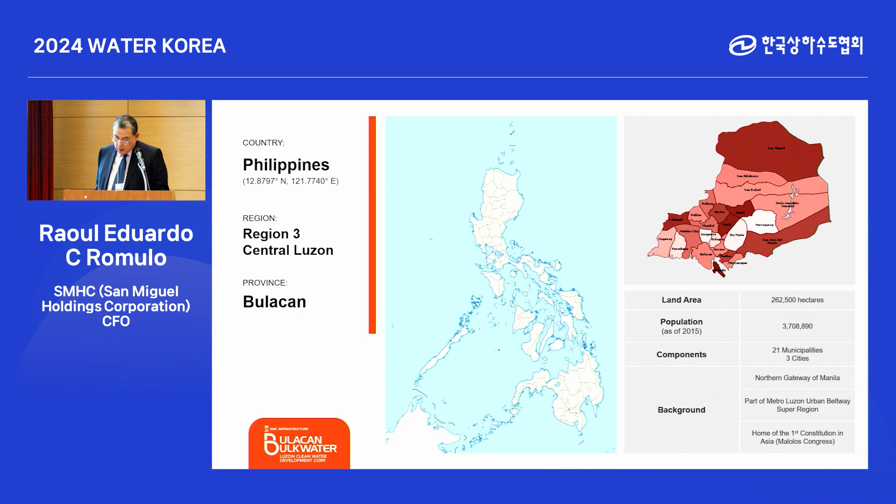Bulacan province is located in the central Luzon region adjacent to Metro Manila, the Philippine capital, and is part of the Metro Luzon Urban Beltway super region. It has a population of roughly 3.71 million people, the third most populous province in the Philippines. It is also the place where the next Philippine gateway, the new Manila International Airport, also a project of San Miguel, will rise.

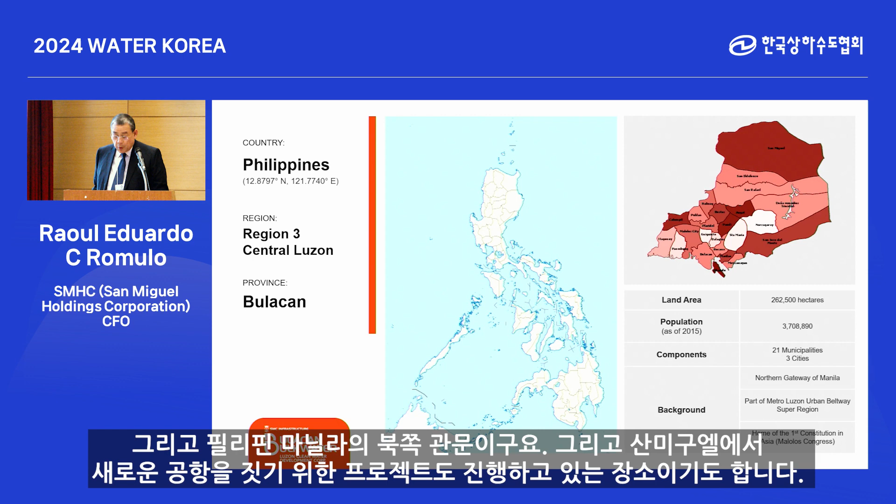Prior to the Bulacan Water Supply Project, most water districts in Bulacan faced several obstacles impinging their ability to supply water to the region. These are the major disadvantages: first, inadequate supply; second, low water pressure; third, depleting groundwater aquifers and saltwater intrusion; fourth, aging distribution pipelines; and fifth, high non-revenue water. The average non-revenue water in this area is 40%.

According to the 2013 feasibility study conducted by IMC Worldwide for the Metropolitan Waterworks and Sewerage System, 68% of households have access to piped water, while 32% rely on standalone water points such as hand pumps and shallow water wells. This shows the inadequacy of the water supply in the area. Due to the depletion of groundwater, it is expected that the water supply in Bulacan province will continue to be insufficient and inadequate to meet the community's current and future demand.

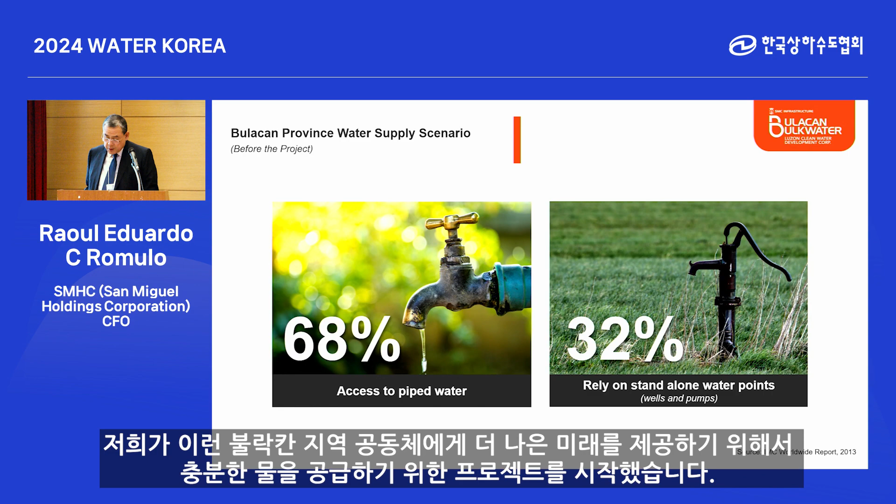Luzon Clean Water Development Corporation is a consortium of San Miguel Holdings Corporation and K-Water. It is mandated to finance, build, operate, and maintain a complete water supply treatment with conveyance facilities for the Bulacan province. Their concession term, given through the Metropolitan Waterworks and Sewerage System, is 30 years.

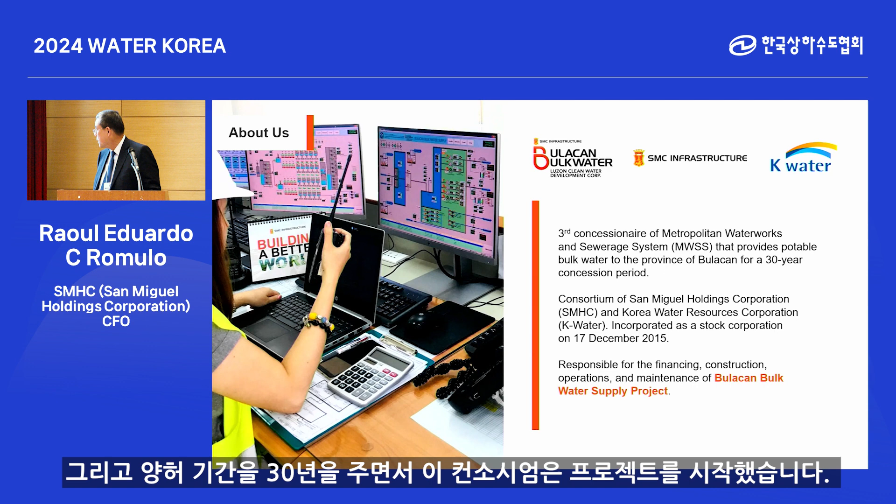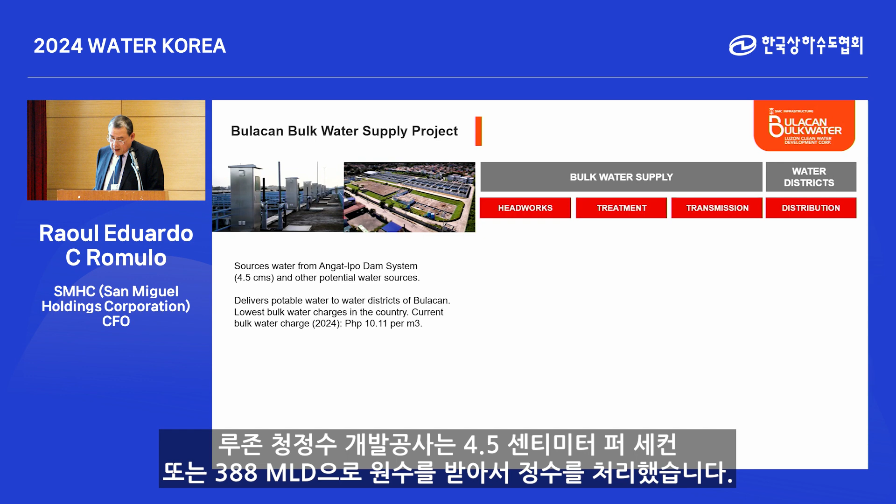Under the concession agreement, Luzon Clean Water Development Corporation, or LCWDC, should be able to utilize 4.5 cubic meters per second, or 388 MLD, of raw water allocation from the Metropolitan Waterworks and Sewerage System and the provincial government of Bulacan, from the existing Angat Ipo Dam system, which is also the major source of raw water for Metro Manila and neighboring provinces.

The initial implementation of the project was to construct a water treatment plant and conveyance facility to cater to 12 water districts, including 3 cities and 9 urban towns of Bulacan province.

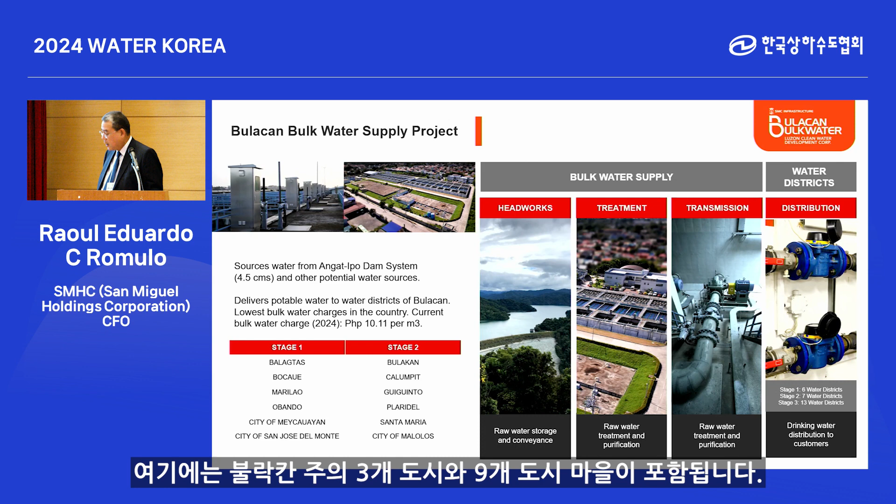How did the project materialize? In 1992, the Metropolitan Waterworks and Sewerage System, a government-owned and controlled corporation mandated to provide water supply in Metro Manila, included Bulacan province in its service area for the purpose of supplying bulk water. After going through the various Philippine government approval processes, which isn't an easy process, MWSS entered into a tripartite agreement with the provincial government of Bulacan and the 12 water districts for the implementation of the Bulacan Bulk Water Supply Project.

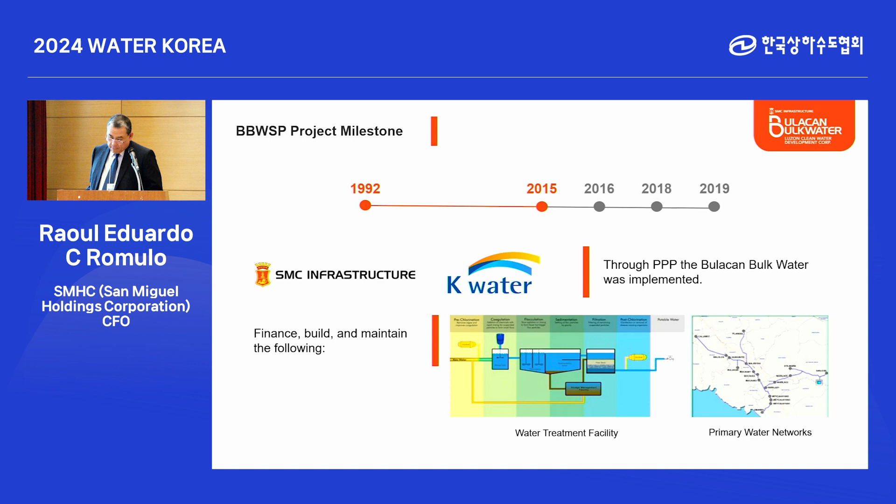In 2015, MWSS commenced the competitive bidding for the Bulacan Bulk Water Supply under a public-private partnership. The project was awarded to the consortium of San Miguel Corporation and K-Water, incorporated under the name Luzon Clean Water Development Corporation, to finance, build, operate, and maintain a complete water treatment and supply conveyance facility. Construction started in July 2016 for the water treatment facility, the primary conveyance lines, and the interconnection points for stages 1 and 2 water districts, and it commenced two years after.

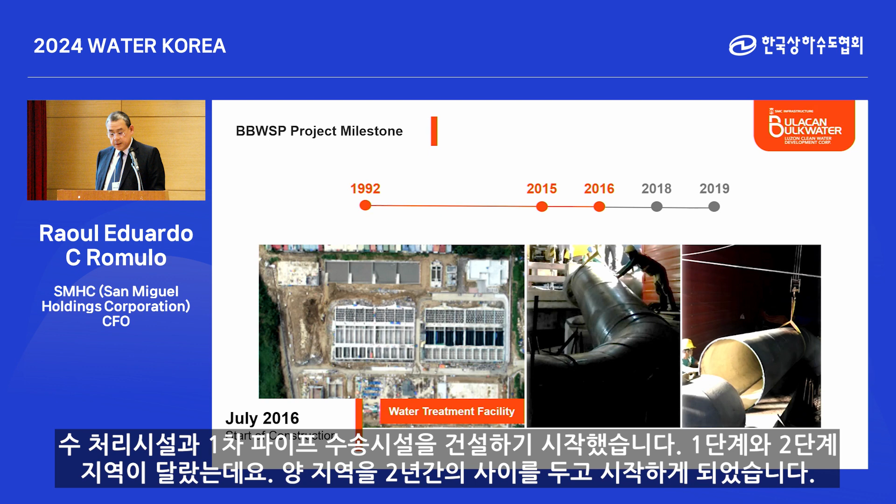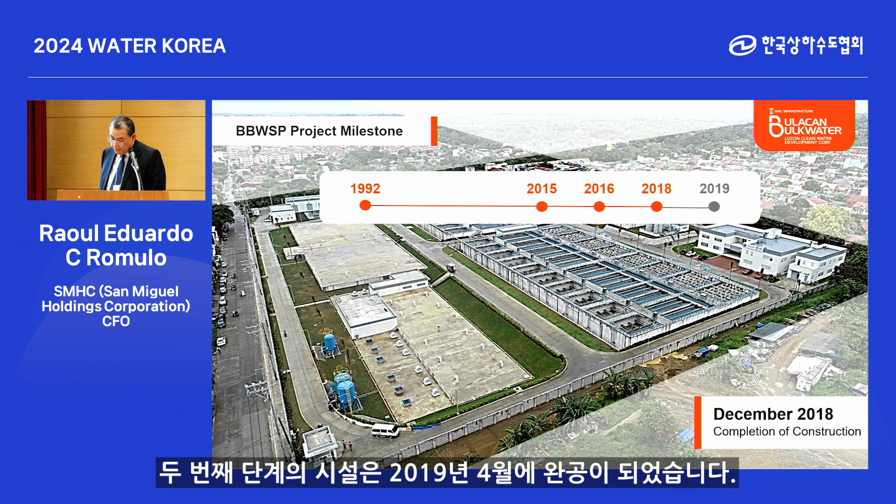On December 17, 2018, the construction of the water treatment plant, primary lines, and interconnection points for Stage 1 was completed. The Stage 2 facilities were completed on April 6, 2019, 20 days ahead of the agreed timeline.

Stage 1 of the Bulacan Bulk Water Supply Project was activated on December 30, 2018, 28 days in advance of its targeted commercial operation in January 2019. On the other hand, the Santa Maria Water District under Stage 2 of the project was activated or energized in

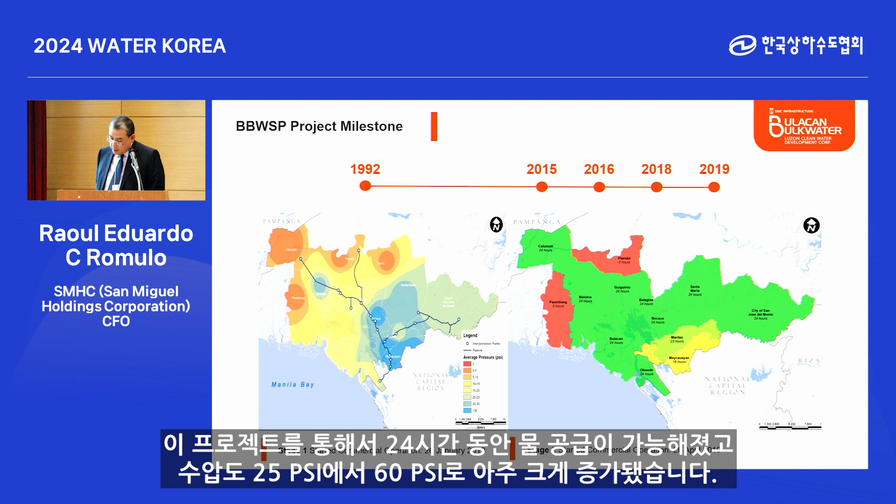February 2019, 2 months earlier than the target commercial operation. Since its first year of operation in 2019, the Bulacan Bulk Water Project has given its water districts 24/7 operation and service, a clear improvement from the previous service of only 12 to 16 hours a day. The project also provided a drastic increase in the average water pressure in the area, from 25 psi to 60 psi at present.

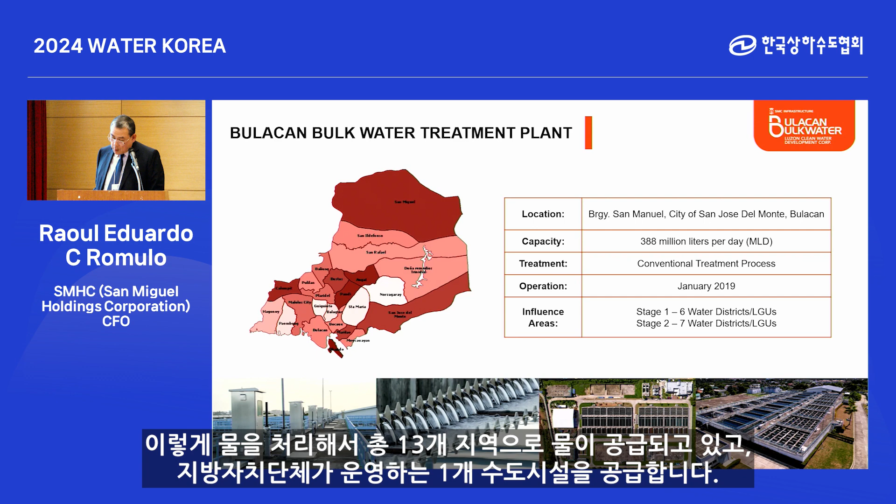Currently, Luzon Water is maintaining a 388 million liters per day capacity water treatment plant using the conventional treatment process. It produces 230 million liters per day, supplies 13 water districts, and 1 waterworks system run by the local government. To reach the outskirts of Bulacan, the company installed 66 kilometers of pipelines.

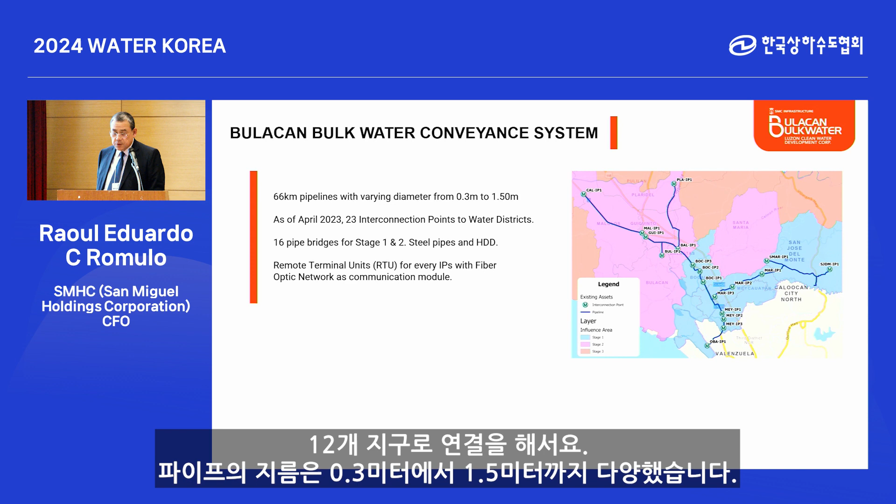From the water treatment plant connecting to the 12 water districts, with pipe sizes ranging from 300 millimeters to 1,500 millimeters, there are 23 interconnection points constructed which serve as tapping or extracting points for water districts from the Bulacan bulk water mainline. It is equipped with SCADA facility for real-time communication of flow rate, pressure, and key water parameters.

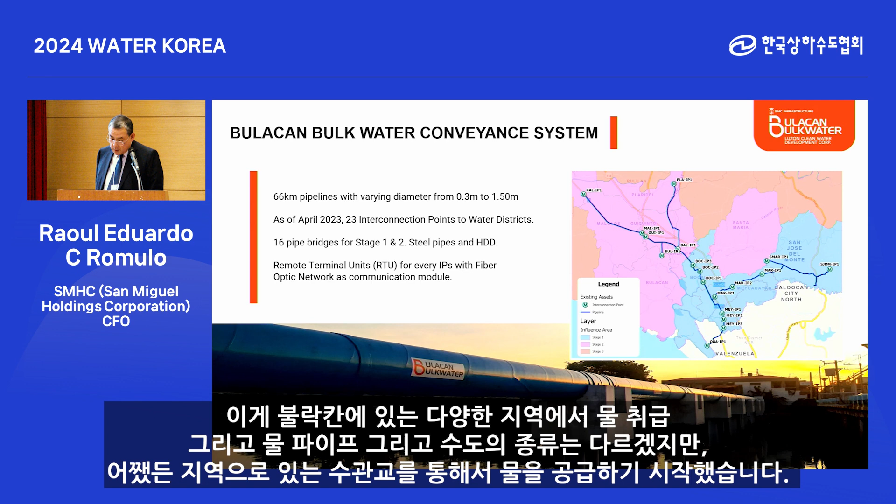In accordance with the concession agreement, there are 5 key performance indicators that the company should comply with in providing the bulk water supply operation to all water districts covered. These are water supply availability, water quality, pressure compliance, non-revenue water, and service coverage. Since 2019, all KPIs have complied with these.

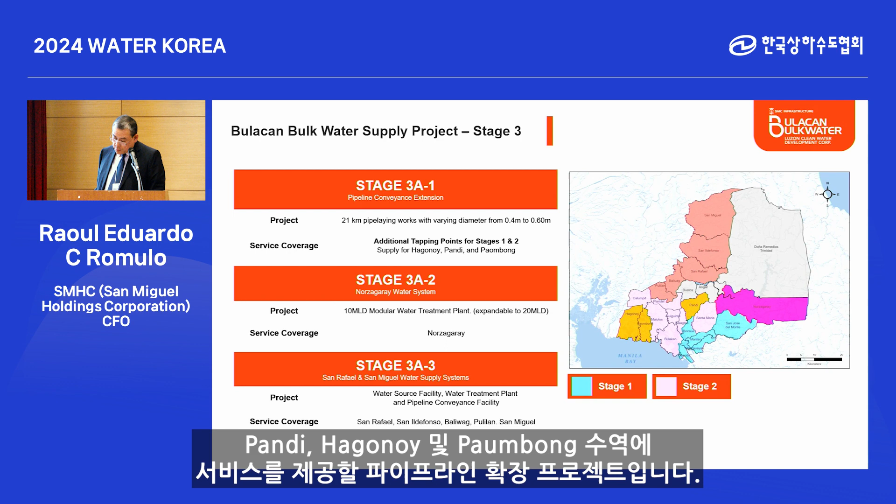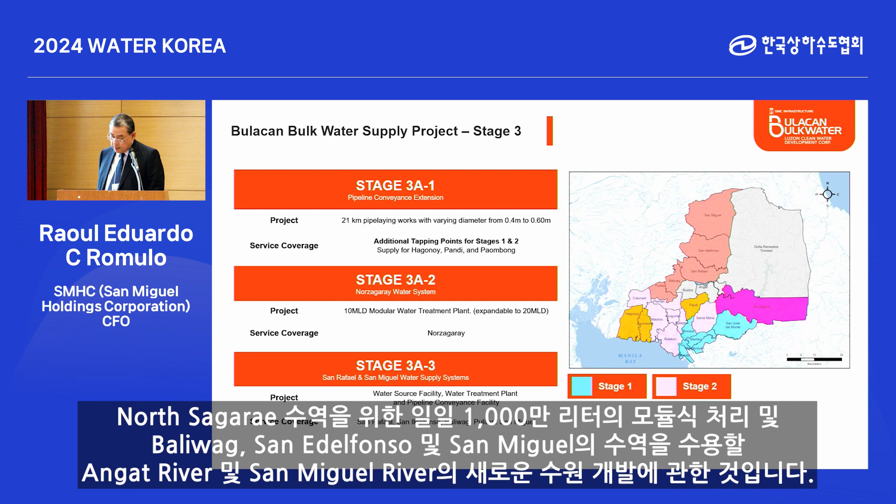A pipeline extension project will cater to Pandi, Hagonoy, and Paombong water districts; a 10 million liter per day modular treatment for Norzagaray Water District; and a new water source development from Angat River and San Miguel River that would cater to the water districts of Baliwag, San Ildefonso, and San Miguel.

In closing, I'd like to thank you very much for inviting us to discuss and share our story. It is a story of perseverance between 2 companies that tried very hard to challenge and go through the challenges that the government bureaucratic procedure had to go through. We hope we have inspired you all, and we are looking forward to more similar discussions in the future.